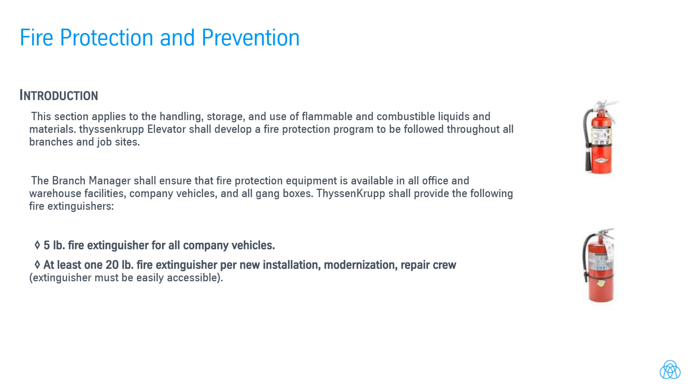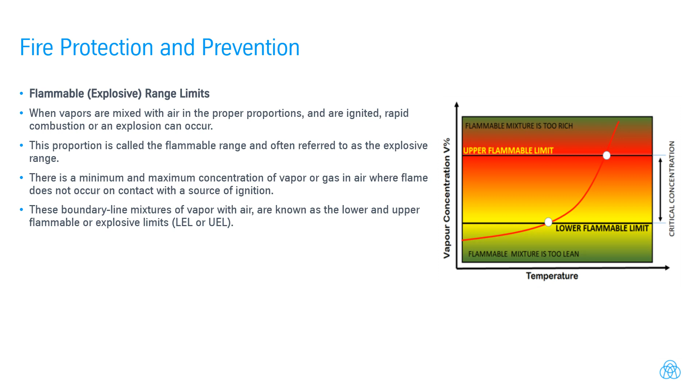Flammable, explosive, range limits. When vapors are mixed with air in the proper proportions and are ignited, rapid combustion or an explosion can occur. This proportion is called the flammable range and often referred to as the explosive range. There is a minimum and maximum concentration of vapor or gas in air where flame does not occur on contact with a source of ignition. These boundary line mixtures of vapor with air are known as the lower and upper flammable or explosive limits, LEL or UEL.

Fire protection, general requirements. The manager/superintendent and/or job foreman shall be responsible for the development of a fire protection program to be followed throughout all phases of work, and shall provide for the firefighting equipment, as specified in this section. As fire hazards occur, there shall be no delay in providing the necessary equipment. Access to all available firefighting equipment shall be maintained at all times.

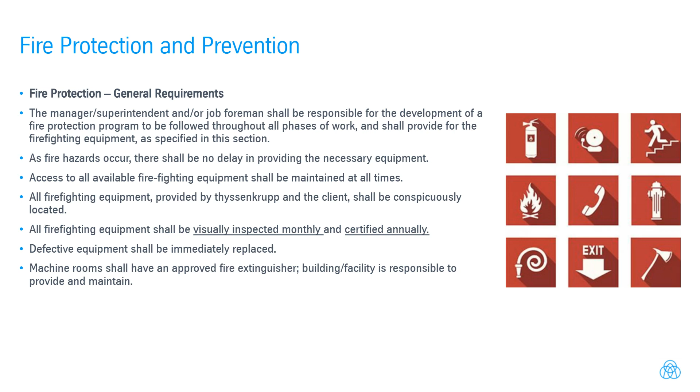All firefighting equipment, provided by ThyssenKrupp and the client, shall be conspicuously located. All firefighting equipment shall be visually inspected monthly and certified annually. Defective equipment shall be immediately replaced. Machine rooms shall have an approved fire extinguisher. Building/facility is responsible to provide and maintain monthly fire extinguisher check.

Nothing blocking access to extinguisher. Pressure gauge shows fully charged. Hose/nozzle is free of cracks, tears or obstructions. Pin and tamper seal are intact. Handle/lever is undamaged. No dents, leaks, rust, chemical deposits and/or other signs of abuse or wear. Dry powder chemical is moving freely inside cylinder. Inspection tag is attached and updated.

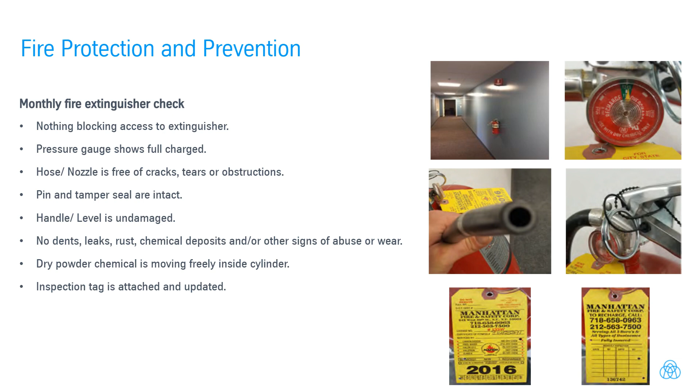Portable firefighting equipment. Fire extinguishers and small hose lines. A fire extinguisher, rated not less than 2A, shall be provided for each 3,000 square feet of the protected building area or major fraction thereof. Travel distance from any point of the protected area to the nearest fire extinguisher shall not exceed 75 feet. One or more fire extinguishers, rated not less than 2A, shall be provided on each floor. In multi-story buildings, at least one fire extinguisher shall be located adjacent to stairway. Extinguishers and water drums, subject to freezing, shall be protected from freezing.

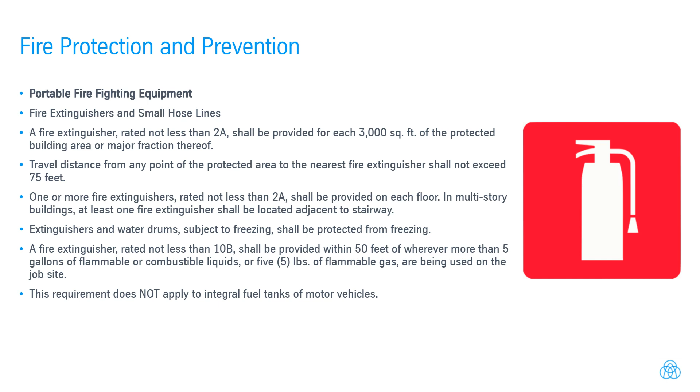A fire extinguisher, rated not less than 10B, shall be provided within 50 feet of wherever more than 5 gallons of flammable or combustible liquids, or 5 pounds of flammable gas, are being used on the job site. This requirement does not apply to integral fuel tanks of motor vehicles.

Portable firefighting equipment, continued. The branch manager or on-site supervisor shall assure that portable fire extinguishers are maintained in a fully charged and operable condition, and kept in their designated places at all times, except during use. The branch manager or designee shall assure that portable fire extinguishers are subjected to an annual maintenance check. Stored pressure extinguishers do not require an internal examination. The responsible manager shall record the annual maintenance date and retain this record for 1 year after the last entry or the life of the shell, whichever is less. Remember PASS: pull, aim, squeeze, sweep.

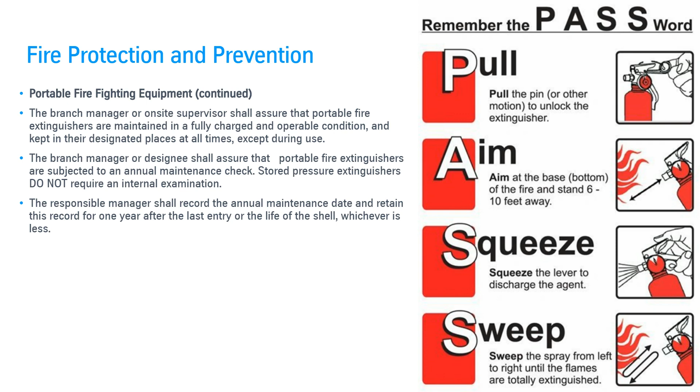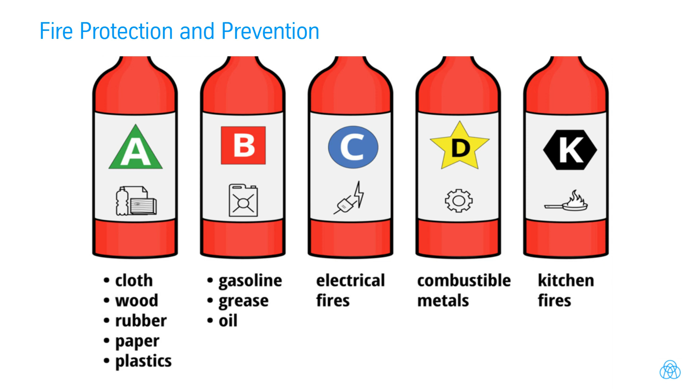Fire protection and prevention. Class A, used for cloth, wood, rubber, paper and plastics. Class B, used for gasoline, grease and oil. Class C, used for electrical fires. Class D, used for combustible metals. Class K, used for kitchen fires.

Fire prevention, ignition hazards. Electrical wiring and equipment for light, heat, or power purposes shall be installed in compliance with the requirements of the electrical section of this manual. Internal combustion engine powered equipment shall be located so that the exhausts are well away from combustible materials. When the exhausts are piped to outside the building under construction, a clearance of at least 6 inches shall be maintained between such piping and combustible material.

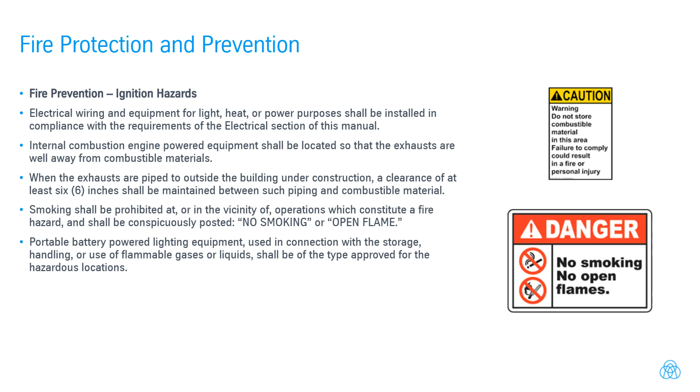Smoking shall be prohibited at, or in the vicinity of, operations which constitute a fire hazard, and shall be conspicuously posted, "No smoking or open flame." Portable battery-powered lighting equipment, used in connection with the storage, handling, or use of flammable gases or liquids, shall be of the type approved for the hazardous locations.

Open yard storage. Combustible materials shall be piled with due regard to the stability of piles, and in no case higher than 20 feet. Driveways between and around combustible storage piles shall be at least 15 feet wide and maintained free from accumulation of rubbish, equipment, or other articles or materials. Driveways shall be so spaced that a maximum grid system unit of 50 feet by 150 feet is produced.

The entire storage site shall be kept free from accumulation of unnecessary combustible materials. Weeds and grass shall be kept down in a regular procedure provided for the periodic cleanup of the entire area. When there is a danger of an underground fire, that land shall not be used for combustible or flammable storage.

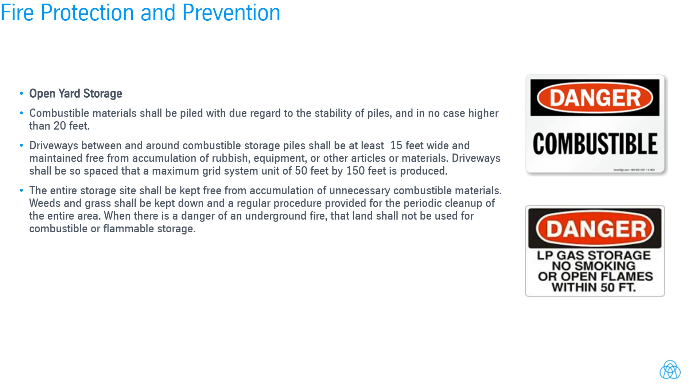Open yard storage, continued. Method of piling shall be solid, wherever possible, and in orderly and regular piles. No combustible materials shall be stored outdoors within 10 feet of a building or structure. Portable fire extinguishing equipment suitable for the fire hazard involved shall be provided at convenient, conspicuously accessible locations in the yard area. Portable fire extinguishers, rated not less than 2A, shall be placed so that maximum travel distance to the nearest unit shall not exceed 100 feet.

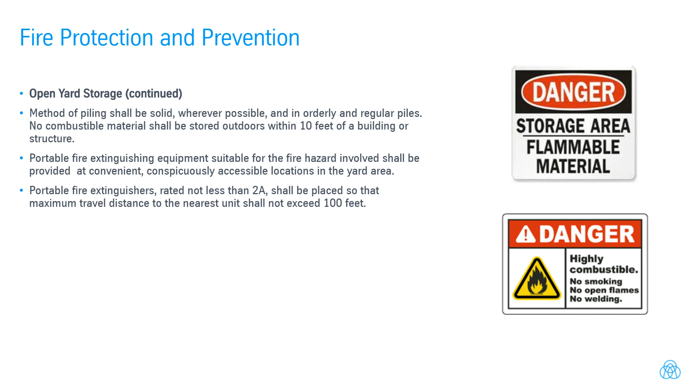Indoor storage. Storage shall not obstruct or adversely affect means of exit. All materials shall be stored, handled, and piled with due regard to their fire characteristics. Non-compatible materials, which may create a fire hazard, shall be segregated by a barrier, having a fire resistance of at least 1 hour. Materials shall be piled to minimize the spread of fire internally and to permit convenient access for firefighting. Stable piling shall be maintained at all times. Aisle space shall be maintained to safely accommodate the widest vehicle that may be used within the building for firefighting purposes. Remember to follow 6S guidance.

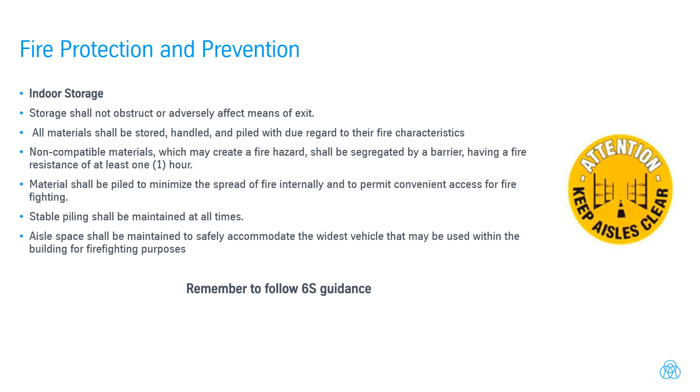Indoor storage, continued. Clearance of at least 36 inches shall be maintained between the top level of the stored material and the sprinkler deflectors. Clearance shall be maintained around lights and heating units to prevent ignition of combustible materials. A clearance of 24 inches shall be maintained around the path of travel of fire doors, unless a barricade is provided, in which case no clearance is needed. Material shall not be stored within 36 inches of a fire door opening. Gas cylinders and flammable materials cannot be stored in non-ventilated areas, such as cargo shipping containers.

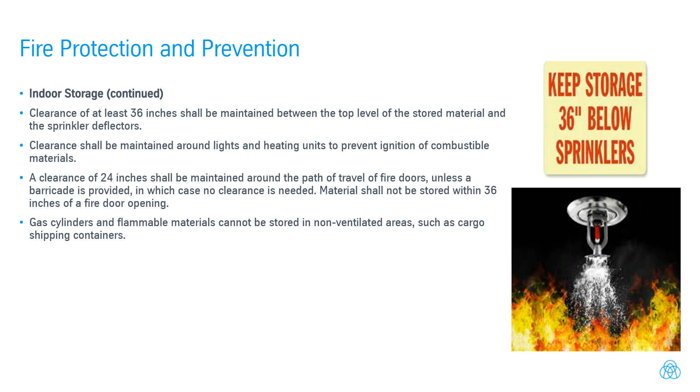Storage outside buildings. Storage of containers, not more than 60 gallons each, shall not exceed 1,100 gallons in any one pile or area. Piles or groups of containers shall be separated by a 5-foot clearance. Piles or groups of containers shall not be any nearer than 20 feet to a building. Within 200 feet of each pile of containers, there shall be a 12 feet wide access way to permit approach of fire control apparatus. The storage area shall be graded in a manner to divert possible spills away from buildings or other exposures, or shall be surrounded by a curb or earth dike at least 12 inches high.

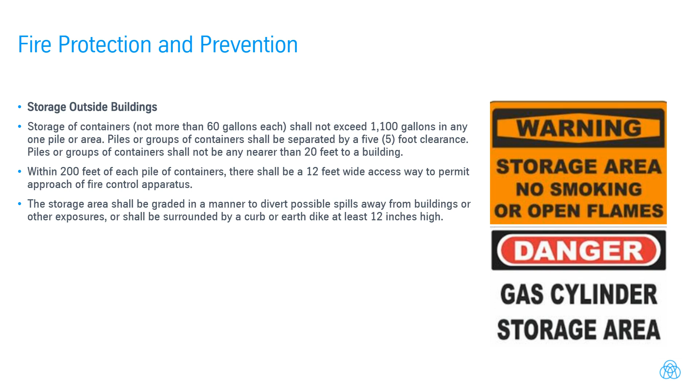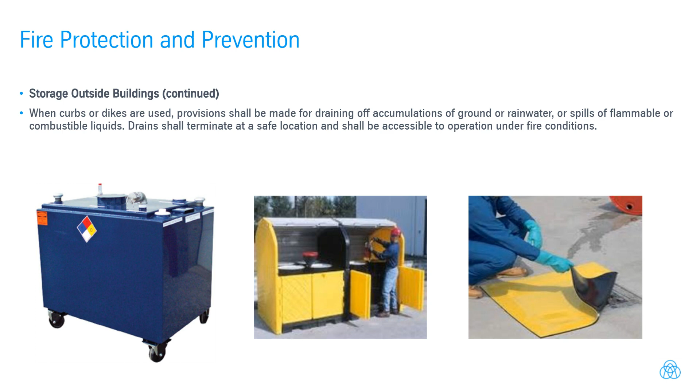Storage outside buildings, continued. When curbs or dikes are used, provisions shall be made for draining off accumulations of ground or rainwater, or spills of flammable or combustible liquids. Drains shall terminate at a safe location and shall be accessible to operation under fire conditions.

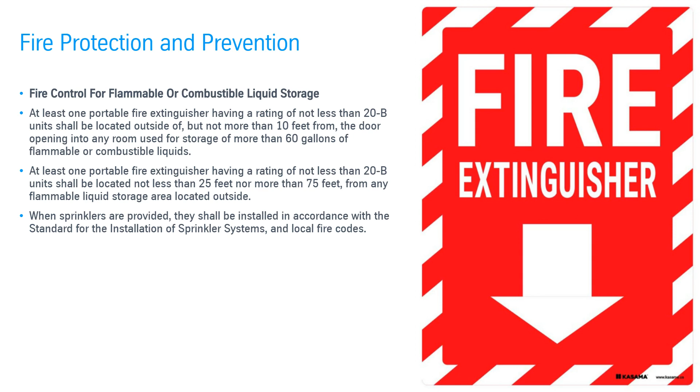Fire control for flammable or combustible liquid storage. At least one portable fire extinguisher having a rating of not less than 20 B units shall be located outside of, but not more than 10 feet from, the door opening into any room used for storage of more than 60 gallons of flammable or combustible liquids. At least one portable fire extinguisher having a rating of not less than 20 B units shall be located not less than 25 feet nor more than 75 feet from any flammable liquid storage area located outside. When sprinklers are provided, they shall be installed in accordance with the standard for the installation of sprinkler systems and local fire codes.

Dispensing liquids. Areas in which flammable or combustible liquids are transferred at one time, in quantities greater than 5 gallons, from one tank or container to another tank or container, shall be separated from other operations by 25 feet or by construction having a fire resistance of at least 1 hour. Drainage or other means shall be provided to control spills. Adequate natural or mechanical ventilation shall be provided to maintain the concentration of flammable vapor at or below 10% of the lower flammable limit. Transfer of flammable liquids from one container to another shall be done only when containers are electrically interconnected, bonded.

Flammable or combustible liquids shall be drawn from or transferred into vessels, containers, or tanks within a building or outside only through a closed piping system from safety cans, by means of a device drawing through the top, or from a container, or portable tanks, by gravity or pump, through an approved self-closing valve. Transferring by means of air pressure on the container or portable tanks is prohibited.

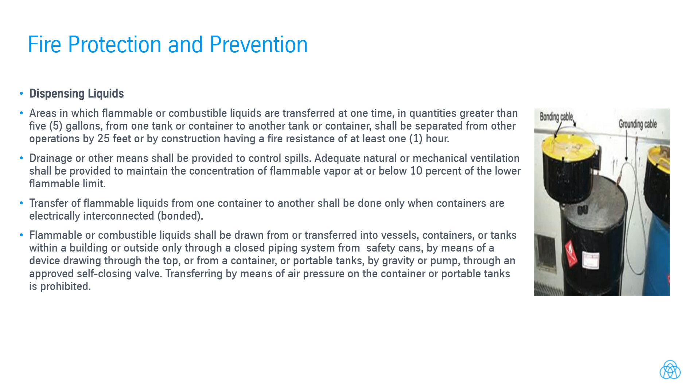Handling liquids at point of final use. Flammable liquids shall be kept in closed containers when not actually in use. Leakage or spillage of flammable or combustible liquids shall be disposed of promptly and safely. Flammable liquids may be used only where there are no open flames or other sources of ignition within 50 feet of the operation, unless conditions warrant greater clearance.